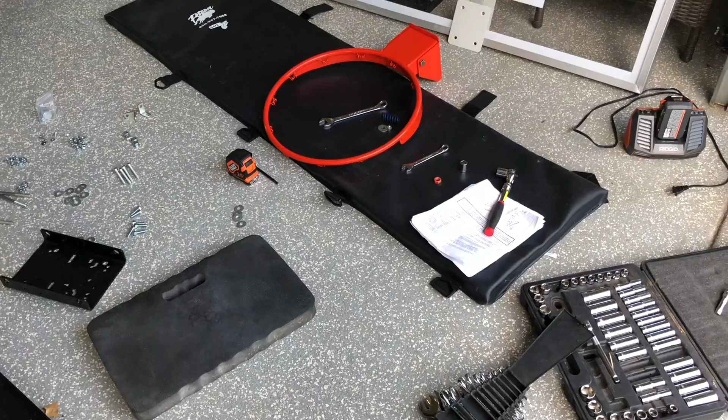All right, you guys, we're assembling this basketball goal right now for a customer, a client.

He's got the pole already there, so whether you put it in concrete or one of these metal bases, it's up to the customer, of course. It's up to you guys. But this one's a little complex with the minimal instructions they have.

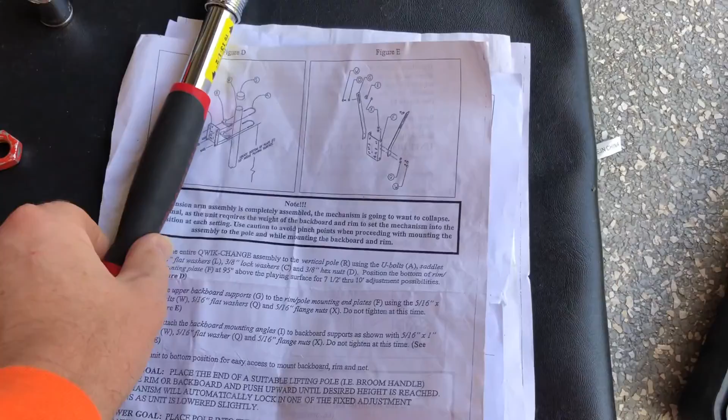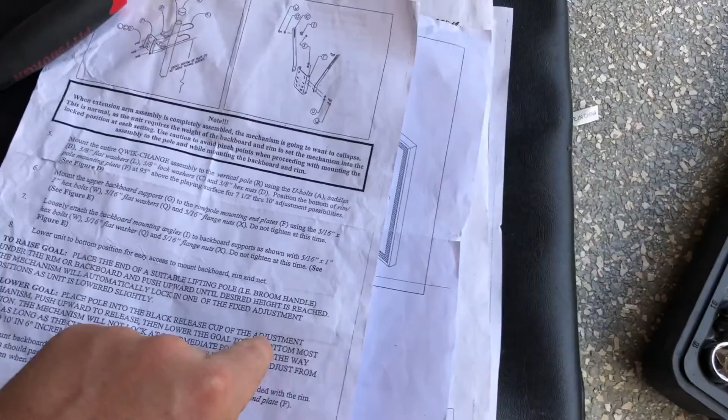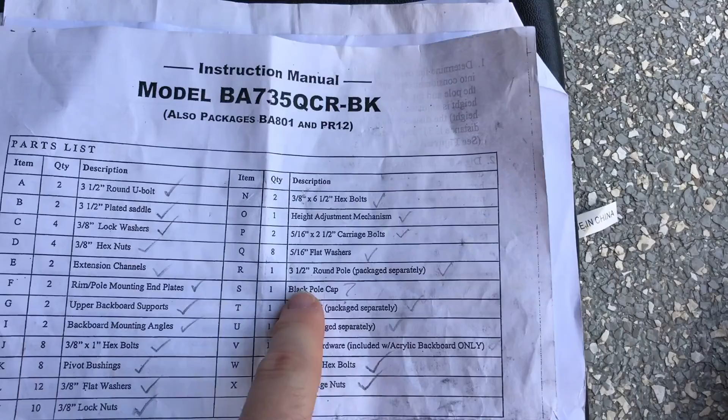It's more reading than looking at the diagram, so you got to verify everything with the reading portion of the instructions. So I highly recommend going through and verifying all the parts, all the hardware. Like I did here, I checked off everything. The only thing missing was the black pole cap. Make sure you go through and verify all the hardware.

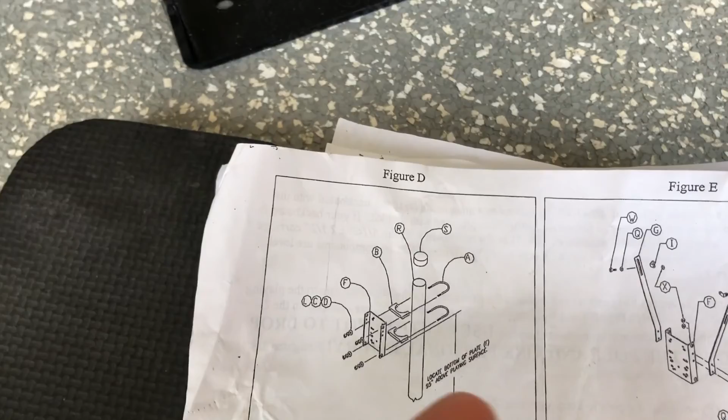There's 2 pages here. I'm gonna assemble this. I only have myself here, so I'm gonna assemble it and show you the exact outcome. But just follow the instructions and go step by step. Take these and put them exactly the way they say.

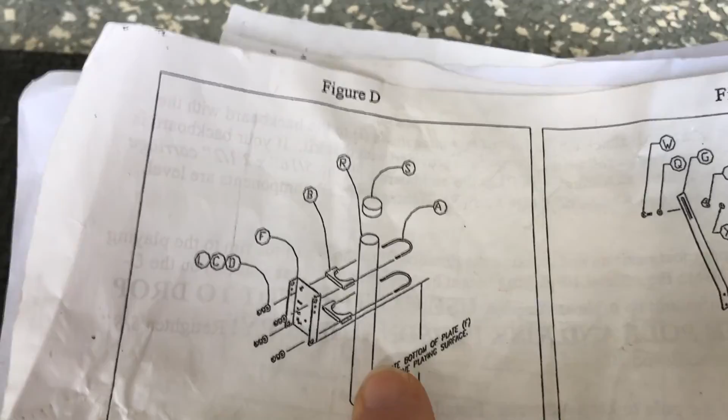You basically need a flat washer, lock washer, and 3/8 inch hex nuts to attach these together onto the 3.5 inch pole. So we're gonna go ahead and do that, and I'll show you the final result on that pole.

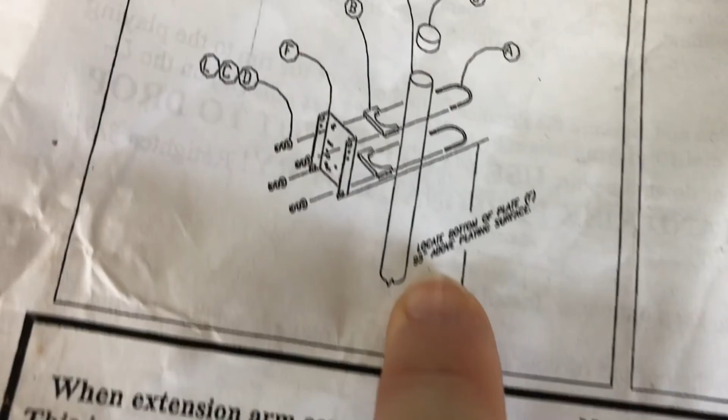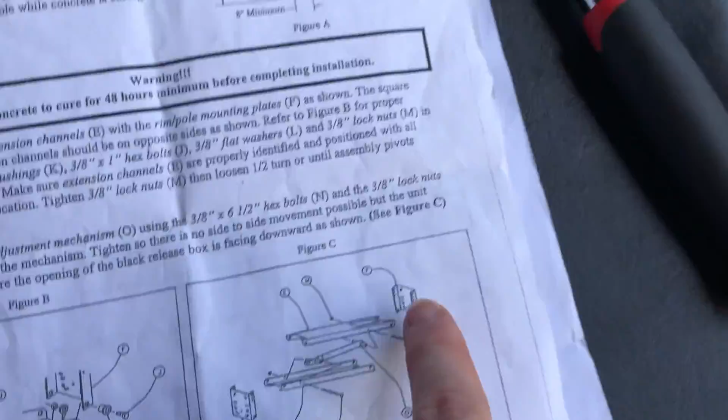It's saying you need to be 93 inches above the playing surface for the bottom of this plate. So we're gonna go ahead and do that, getting this mechanism assembled and then attached to the bracket that's already on the pole. Make sure you do that, and then you can move forward with getting those support arms in place.

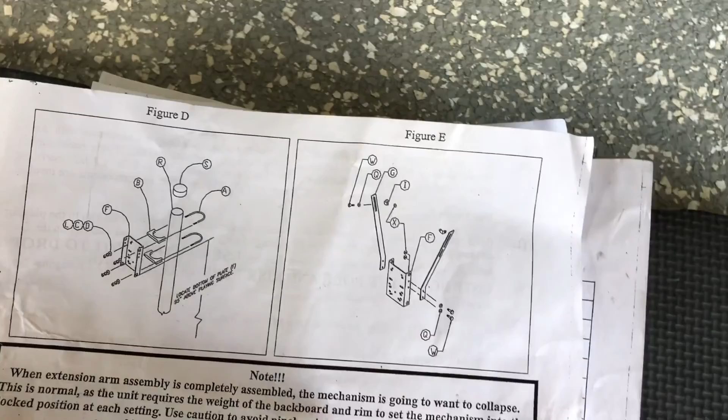And then I'll go on to the next step of assembling these extension arms, which are the backboard support arms, and I'll take you through exactly what you need to make sure you got the right bolts and washers and things like that, because that's what this customer was struggling with. I'll take you guys through that.

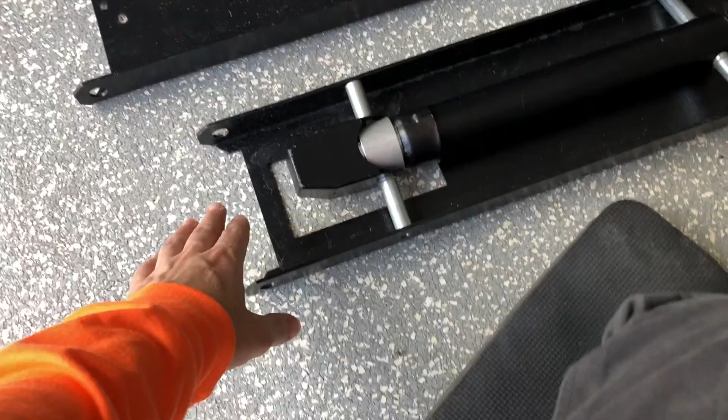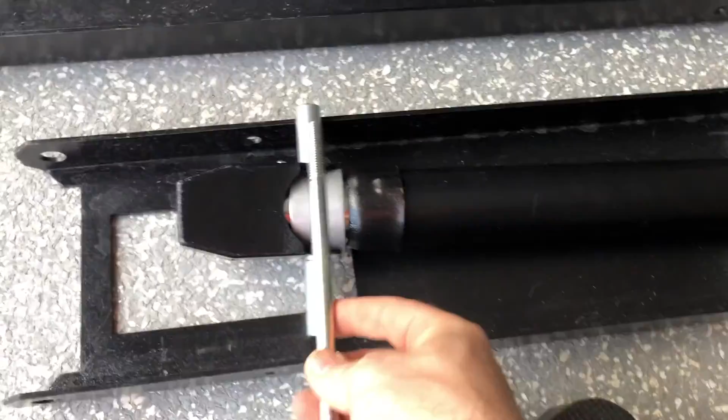Okay, so now we're gonna assemble the 2 extension channels onto the height adjustment mechanism. We're gonna use these 2 bolts here that go right through here in their proper place. And it's all 3/8 inch lock nuts, and you definitely need to use these. These are the pivot bushings, so make sure you get those in place as well. You want it to be able to pivot smoothly.

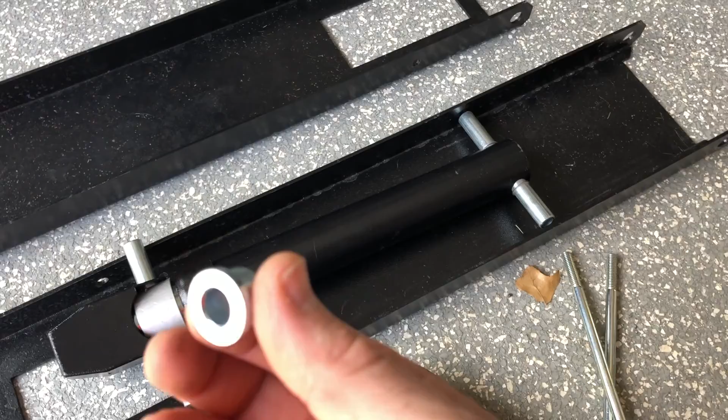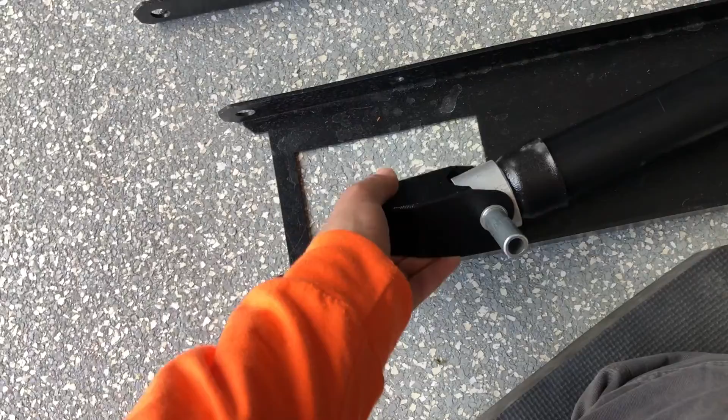2 things to make sure you verify: the opening here. When you assemble this, you gotta have it on opposite ends. So one rectangle opening there, and then the other one at the opposite end when it sits on top. Also, for the bottom where this hole or opening is gonna be, you gotta have this piece at an angle facing down.

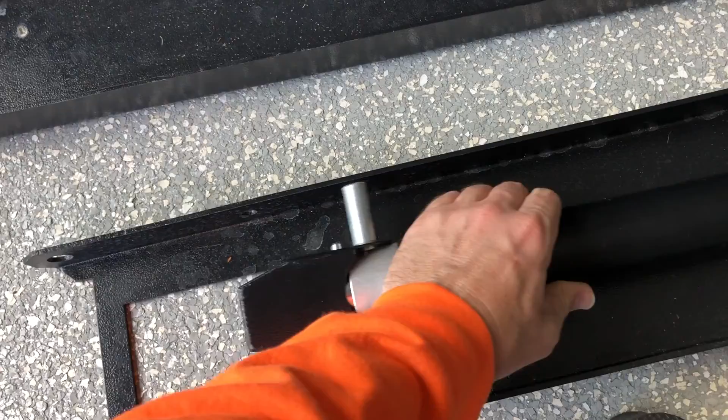So somewhere along these lines is where you need the adjustment mechanism on the bottom channel plate. So it's gonna look like that. You see the cutout here, the top one's on the opposite side.

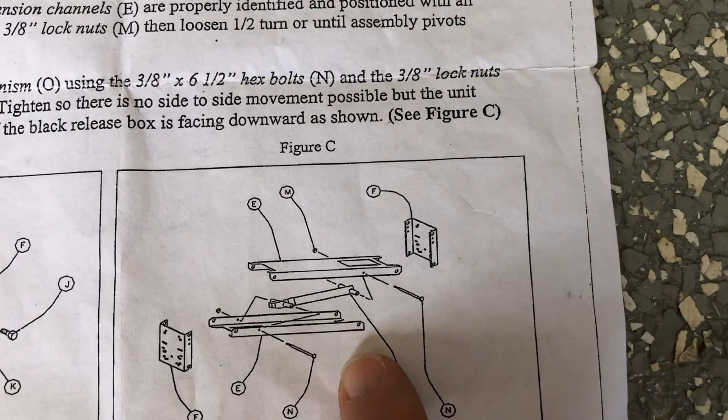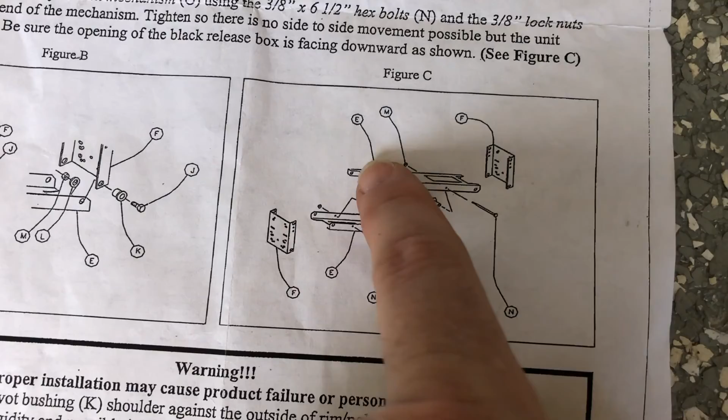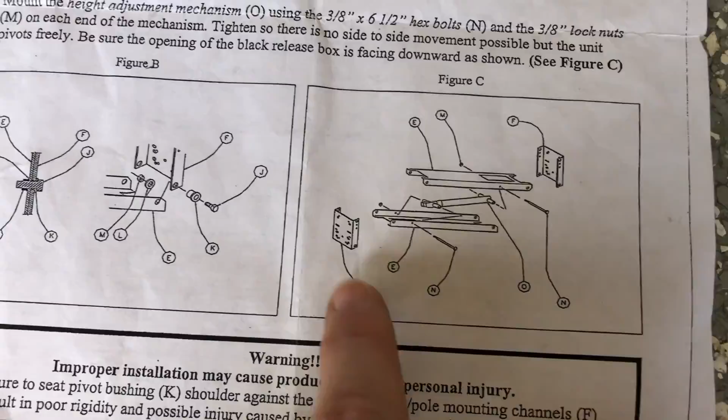These 2 holes are gonna attach to the plate that I already have mounted on the pole, and then this plate is an additional one, part of it is gonna be mounted to these 4 holes on the front of the extension channels. I'll show you what it looks like in the end, but make sure you place everything properly, and it should function as stated in the instructions.

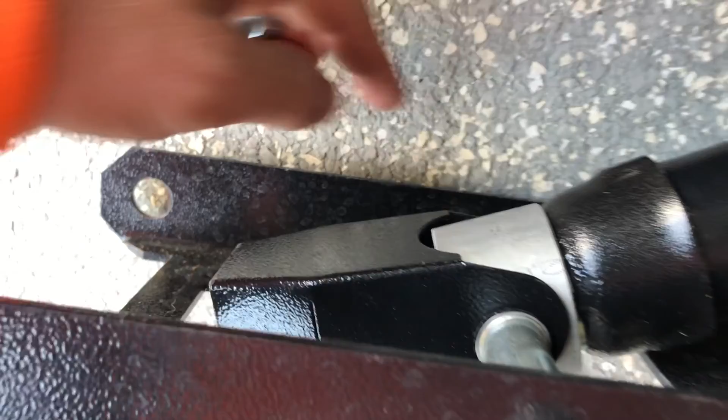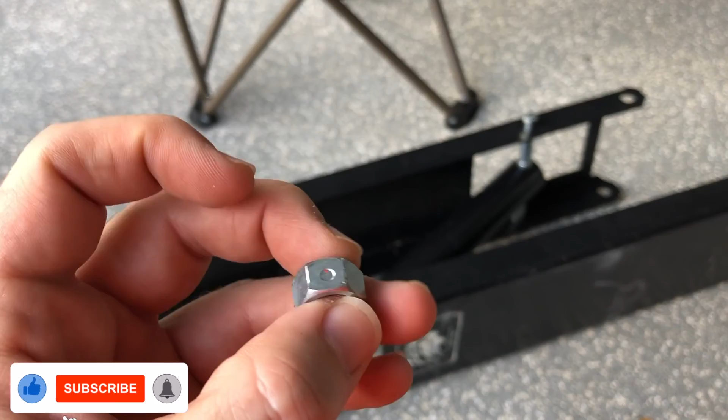Okay, so 2 very important things: when you get these 6.5 inch, 3/8 inch bolts all the way through to the other side, these are the lock nuts you use. The lock nuts have 2 indentations on them, whereas the other nuts, the 3/8 hex nuts, are just flat all the way around. So you know those are the standard hex nuts. There's quite a few of those, so that's how you know they're lock nuts, with the 2 indentations.

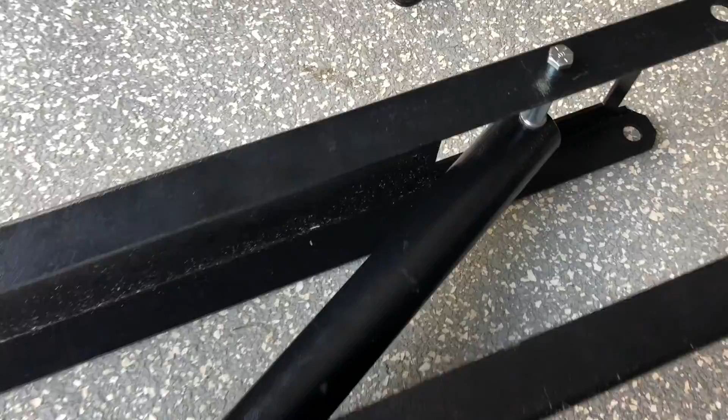That's what you want to use on this portion of the assembly, and when we get all 8 bolts attached to the square plate there, and the one up on the pole. Keep in mind, you want this coming out of the bottom hole there. That's where you're going to be able to adjust the height of the hoop.

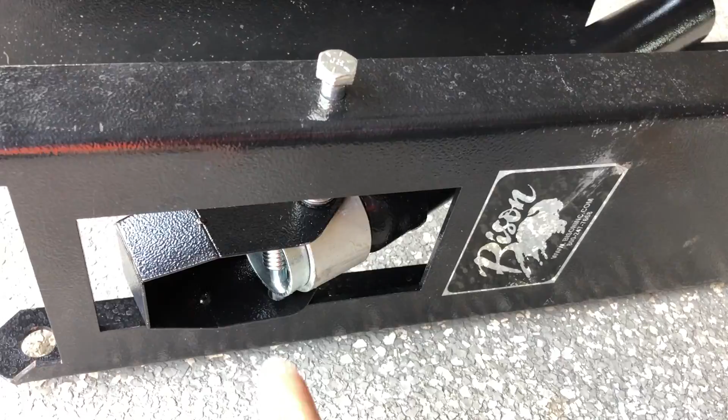And then as you see here, the front of this adjustment mechanism is screwing into this channel piece, and the back of it is screwed into this other channel piece. So you don't try to get both on one plate, so it's at an angle, as you can see. Those are 2 very important things to keep in mind.

And then I'm gonna go ahead and move on to the next step where we get the whole setup attached to that square bracket on the pole, and then we'll attach the front bracket onto the front end of this.

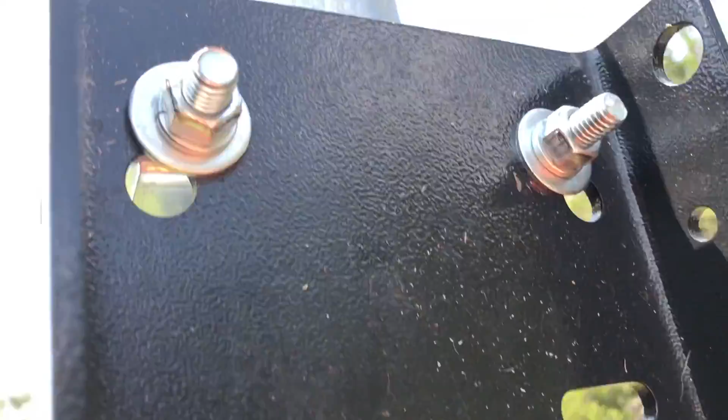So let's go ahead and go forward. So here we are. We got the channel mechanism and the height adjustment mechanism with 2 bolts on the back bracket in place. I just hand tightened it just to hold it here. But these 2 bolts will hold it in place, and then we'll get the top 2 bolts here in a moment.

But I just wanted to show you, I want to do everything I can to show you that one person can do most of this assembly. I'll just need help when it's time to get the backboard up there. So this will come together here in a moment, and I'll show you guys how it looks once it's got all 8 bolts in place with the 2 front and back brackets there, and the channel mechanism with the height adjustment mechanism all in place and ready for the back.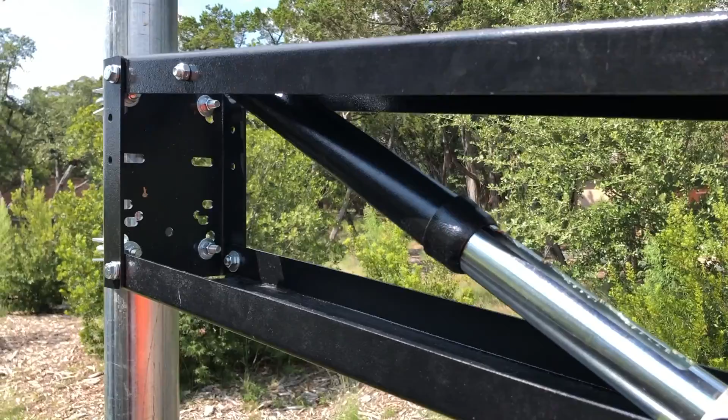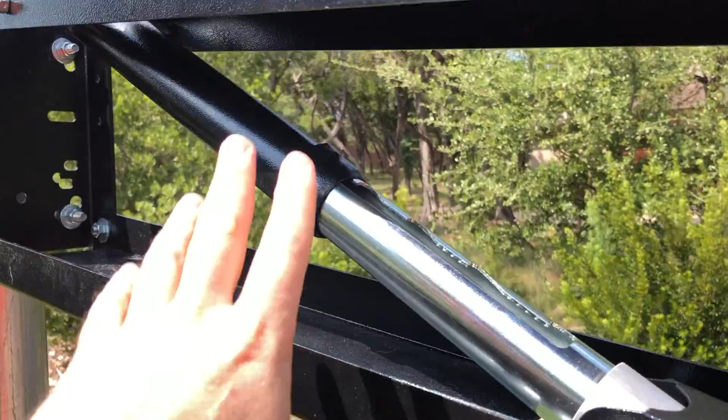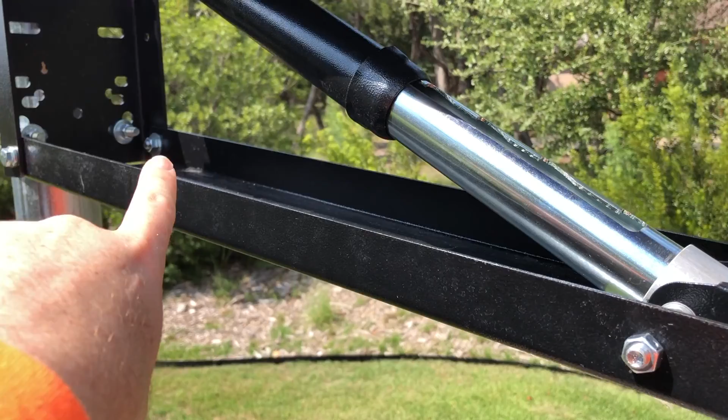Okay, now we have the entire support arm, upper and lower, with the adjustment arm here in place. Front plate is secure. The way I did it worked really well for me by myself. So I connected the 2 bottom bolts to the entire 5 pieces, counting the adjustment piece, the front plate, the back plate, and the 2 channel arms. I attached those 2 first, then brought the front plate, attached bottom, 2 top, and tightened those 2 last ones at the end. I just hand tightened them to hold them in place.

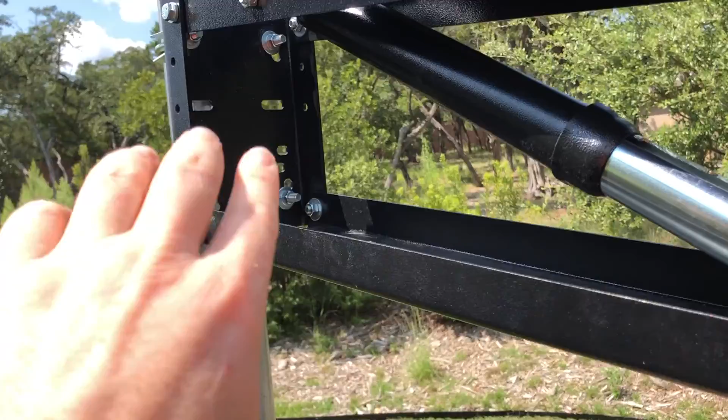Then you get your impact gun, a subcompact impact gun does just fine. So then you get this in place, and then you can adjust. This is where the adjustment is, you just push that up, you see it goes up, and you also bring it down like that. This doesn't really stay down without the basketball hoop on, so you need that weight. I mean, it'll stay in place, but if you just lift it, it goes up on its own. So just keep that in mind when you're working with it so you don't smash your fingers.

Now we're gonna attach these 2 arms right here on the front plate. These 2 holes here, they're gonna come out because that's what's gonna support the backboard. But that's it. Let me show you from a distance what it looks like.

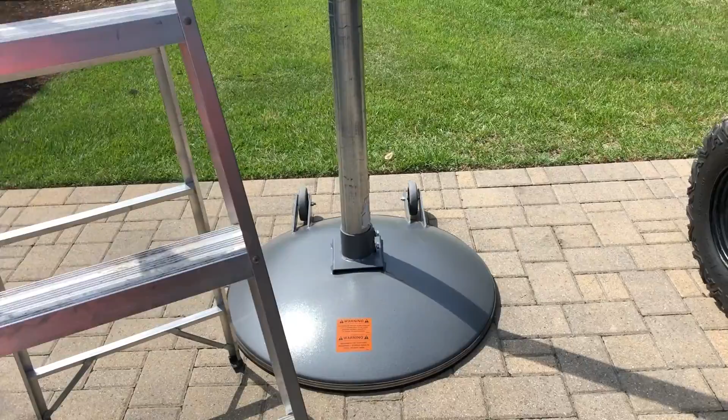That's what it should look like. And it should drop down to 7.5 feet and go up to 10 feet if you need it. It goes by half foot or 6 inch increments up and down. Depending on your placement of it and how the pole is, that'll determine how level the hoop is. So other than that, you can't really adjust it much from there. But he has it on like a concrete base that can be moved around, but it's also on a brick base, so it's not perfectly level, but it's pretty good. And that's what it looks like.

So let's go on and get these arms on there, and then we'll work on getting the backboard up and in place. Okay, and then here with the installation of the arms that are gonna hold the backboard. So you can see, just get one in, hand tighten, and it keeps it from falling or anything. It'll rest against the other nuts and bolts here. So I got them both in place.

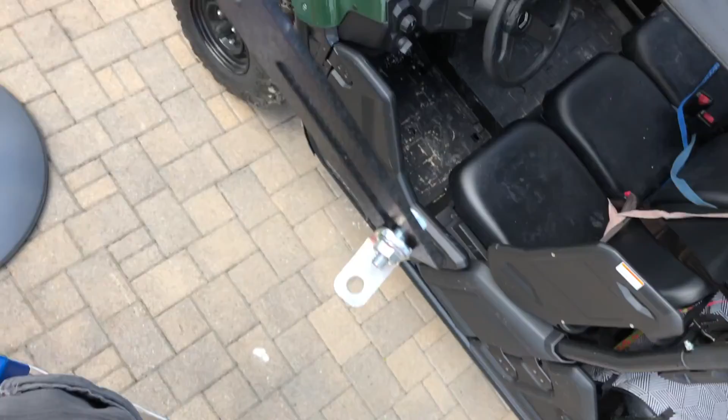And then we're just gonna get the second hole in place, and the arms will be standing. Like I said, just hand tighten here is fine to keep them in place so you can use your hands to do other things as you continue forward with the assembly. So pretty easy to do as it comes together.

So okay, now I'm going to attempt to get this acrylic backboard up there by myself, just getting them into the 2 L brackets there. If I can get those 2 bolts even hand tightened, it'll hold the backboard up there until I get all the other nuts and bolts in place. Just want to show you guys that it is possible for one person to do it here. If not, it's definitely a 2-person job.

Here we go. All right, we have the backboard in place with just, if you look right up there, 1, 2 screws. It's just holding it in place. All I had to do was hand tighten it, but it is holding it there. And now we're gonna get the rim and the backboard to line up to the 4 holes on this black metal plate here. So it's gonna look good.

But yeah, you could definitely get that backboard up by yourself with a 6-foot ladder and just do the 2 screws. Just take your time, 1 screw at a time, just hand tighten it. So they're still loose, but it holds the backboard up, and then you can tighten it down as you line everything up. So I'll show you that once we're done.

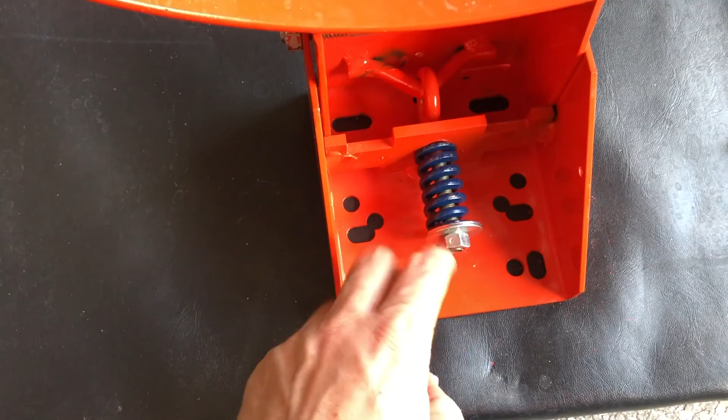Okay, before you go to put the rim up on the backboard there and get all those 4 holes lined up, make sure you get the spring on with the big spring washer. It's the biggest washer, flat washer in the hardware packaging, and then a lock nut there.

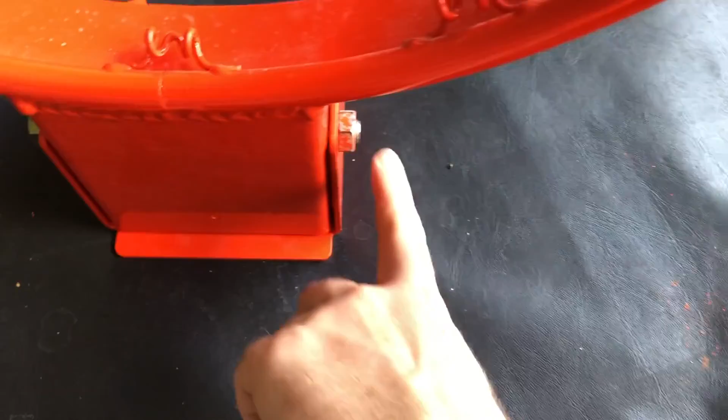I like to put it where the lock nut just goes right past the bolt threading, and make sure it's secure. Then make sure this bolt here, that's the hinge, is tightened, but not to where these plates smash against the rim holding piece here.

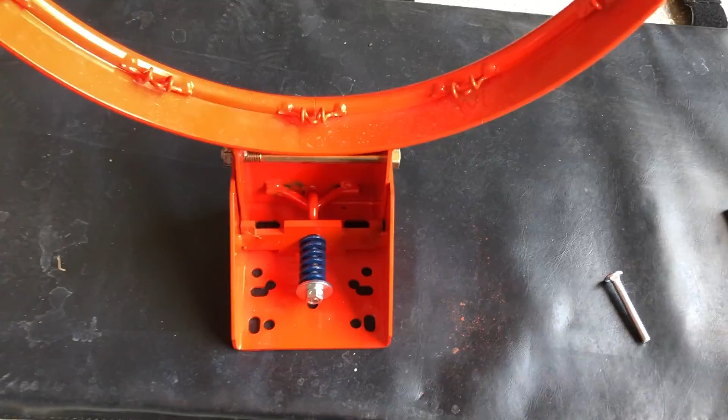So get that assembled, and then we are going to go ahead and take it to the backboard and try to get everything lined up and get the 4 bolts in place.

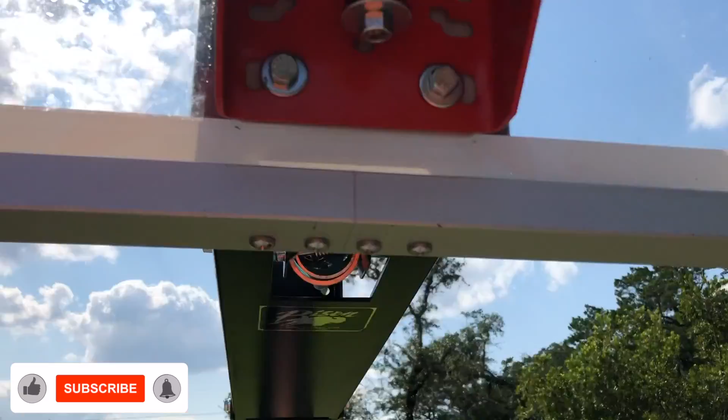So I got the rim on. You can see just preliminarily, I tightened 1 bolt just to hold it in place. Now I can go up here and get the other washers in place from behind. I don't know how well my camera is doing, but all these washers here, because I just got 1 holding. So you can do that yourself: just get 1 to hold the rim, then get all these properly tightened down, and go from there. That's how I was able to get the rim in place by myself.

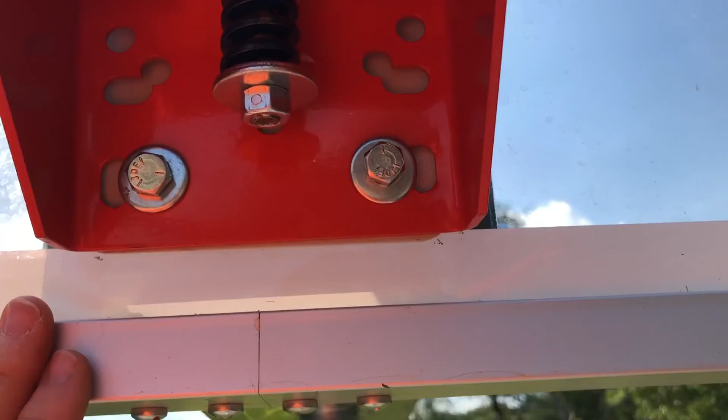It was a little difficult, but not impossible. Now we got the 4 bolts there, and that plate in between the backboard and the rim. This off-white, beige colored one is there as well. So we have everything in place as it needs to be. We'll go forward and I'll show you the outcome.

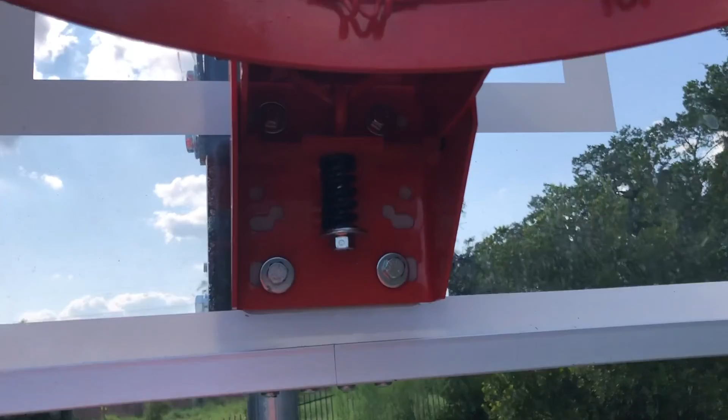Okay, we got the brackets up there at the top of the plexiglass backboard completely tightened with my impact wrench. Then we got these little screws with the plastic washers tightened down as well. I put another metal washer back here as extra reinforcement because it smashes that rubber plastic grommet pretty tightly, so that helps.

So the only things I left hand tightened right now are these 4 bolts, 1, 2, 3, and 4 there. That way I can adjust the backboard this way, and we're going to get it level at the top.

So we're going to put my level. We can either put it on the hoop, and as you can see it's not level, but it's pretty close. Let's see how level the backboard is, and then we'll go from there. Basically you got to level the rim and the backboard, and you do that by leaving these 4 bolts down here loose. Okay, that's it.

It's all level, squared up nicely. I think it's at the 10-foot height. I'm going to go ahead and measure it to make sure it's 10 feet off the floor. It is nice and secure, nice and solid.

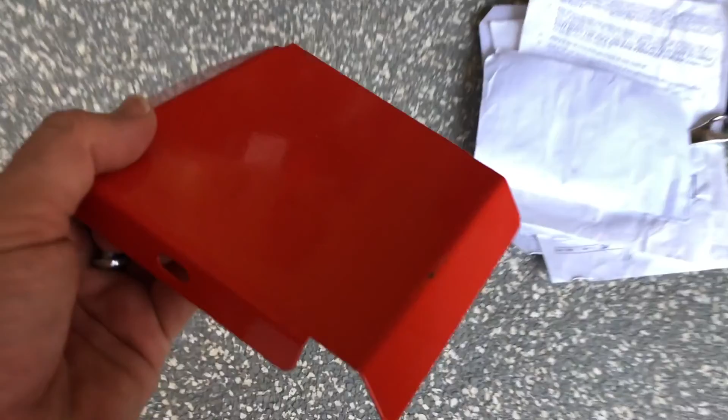We just got to put this orange plate cover right here. It's just 2 self-tapping screws, I'll show you guys. This can only go on one way, but it's these 2 Phillips screws right here with this plate to cover it. It can only go on one way.

Okay, so this is basically a really nice solid net. Basically you wrap it around, push it through, then bring it back around and pull it to where the net comes through this hole, right straight through like that. This little lip is what keeps the net from coming out of place. So you just do that all the way around, which I'll do.

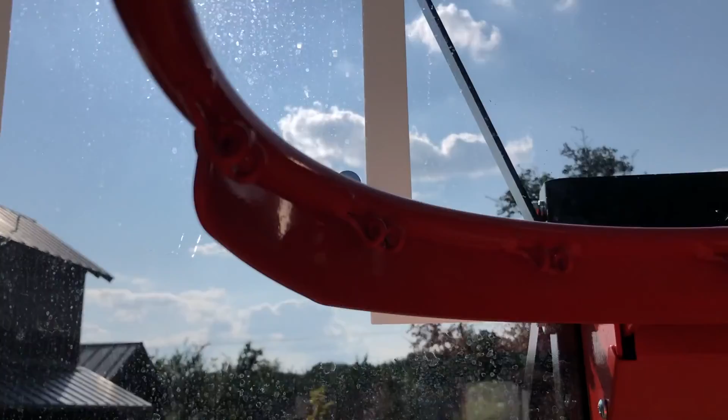Sorry I couldn't do it with 1 hand, but this is really thick, so I needed both hands to pull it through. Just wrap it over, then grab the loop around, push it in, and that's the end result that you want.

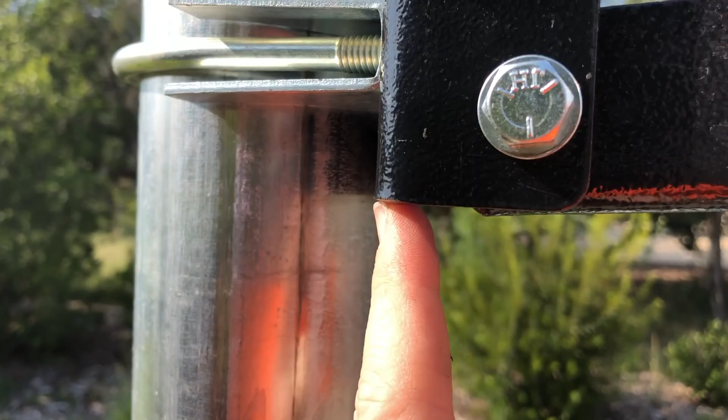Okay, so one way to lower the entire hoop mechanism is, of course, loosen these 4 bolts that hold the U-clamp in place here. Then, the way I'm doing it, because I have to drop it to here, the bottom of this plate has to be right here for it to be exactly 10 feet.

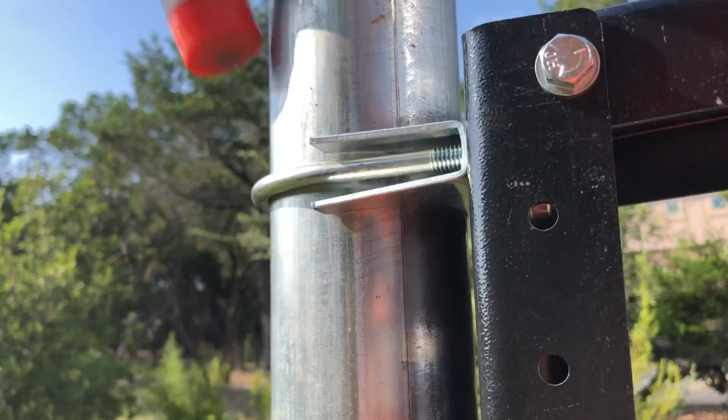So what I did is you just hit the U-clamps down, just like this. Put them in this direction, right, where they're like that. And then this one as well. Then you just swing the hoop, the entire hoop, back and forth, and it'll drop inch by inch, half inch or so.

And I am almost at the line. So just do that and then retighten these 4 bolts. Make sure it's all lined up and you'll have exactly 10 feet.

All right, you guys, well, thanks again for tuning in. We got this guy completed, shot a couple buckets to make sure it works just fine. So I appreciate you guys tuning in.